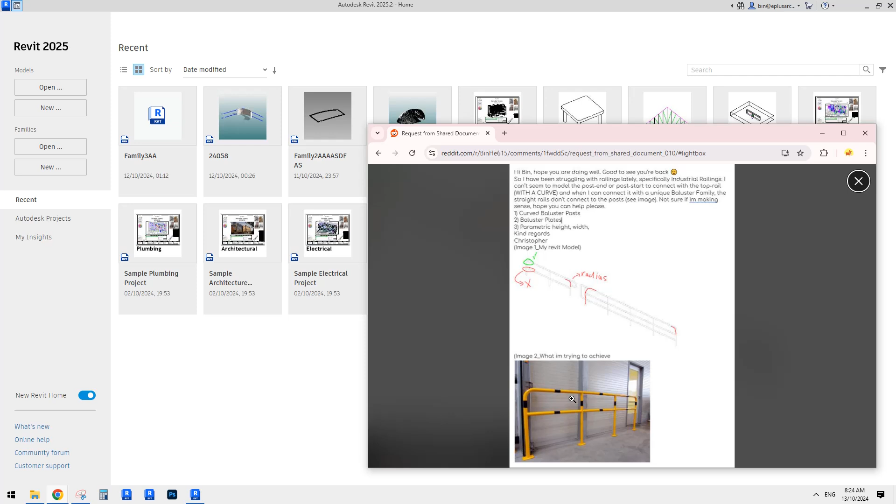Today we're going to model this railing, industrial railing. So we need to achieve this corner, which I think is quite simple, and how we can connect this bit. Okay, let's start. So we're going to start with a project.

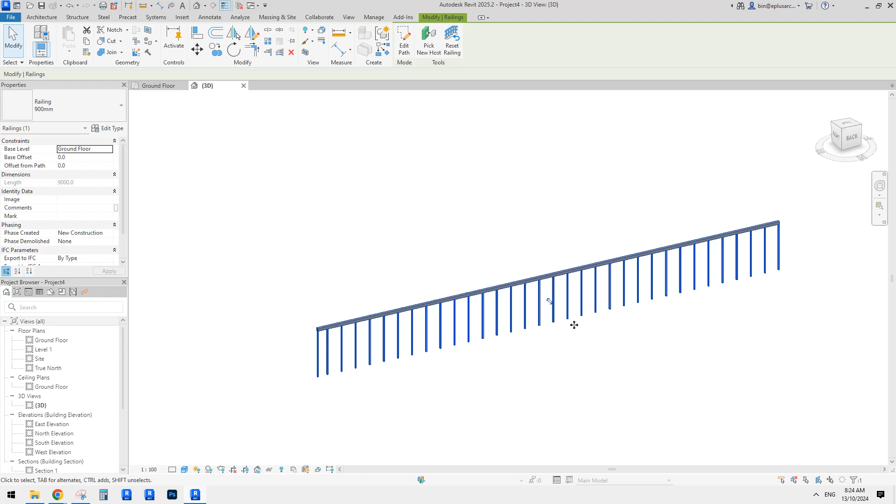Okay, so first I'm going to just create a railing. Okay, so finish. Let's go to 3D view. Okay, so this is a standard, a basic one. Oh, hang on. There are some more. Yeah, so these are some different ones, right? Okay, so let's start with this one.

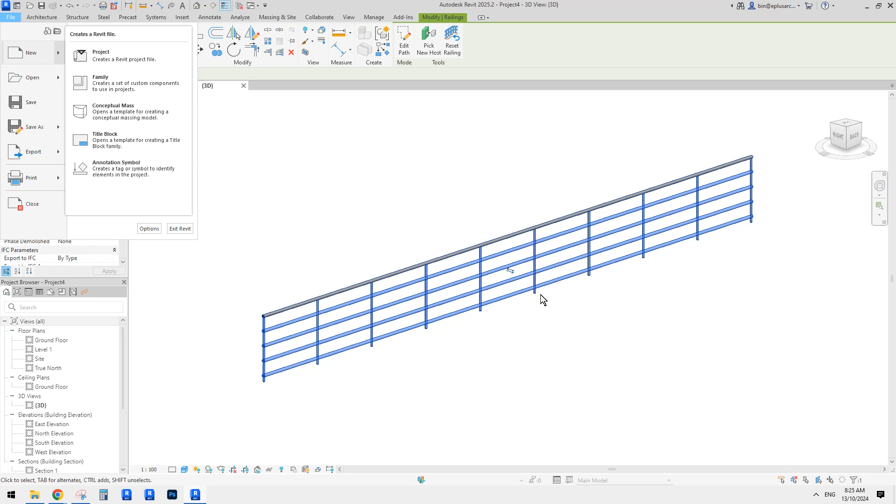Railing is a system family, so you can't just model one from here unless you wanted to just create a generic model, like a line-based generic model. But what we are going to do is railing, system family. So we need to start from one and go to edit type, and I'm going to just duplicate, so I'll keep the original one there. Okay, so I'll give it a name.

So now we start to change the settings. So first let's have a look. So this is quite simple. For the top one, you can use top rail, which is here, or you can also use non-continuous rail structure, which is here.

So if you click edit, you'll see in this family there are 1, 2, 3, 4: 100, 300, 500, 700, and this is top rail. So if we need to change it, apparently we need to delete some, so let's just delete this one and this one, and only keep one.

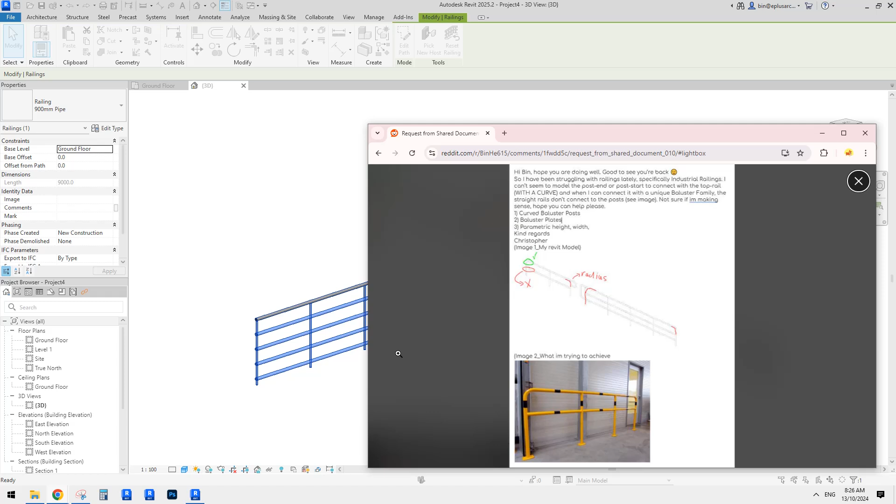Okay, and then for that top one, we're going to use top rail. So just check the height, so we can just delete this one. If you want to change this one, you can. Maybe I'll just delete this one and change this one to maybe 600. Okay, so apply, and you will see nothing changes. That's fine. Okay, so now we have this one and this one.

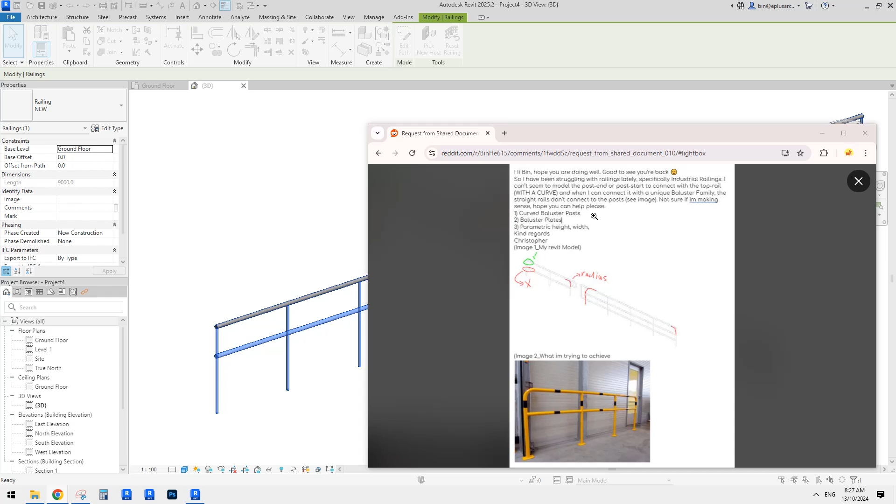So the top rail in this family looks okay. It's circular, 40 mil, which is exactly what it looks like. Yeah, that's what we need. But then, see, we need to change these posts. For posts, we have different options as well.

So you can see baluster placement. Balusters are usually those vertical elements. And then here we have options. So this is the repeating element here. So see, currently we have a 25 round.

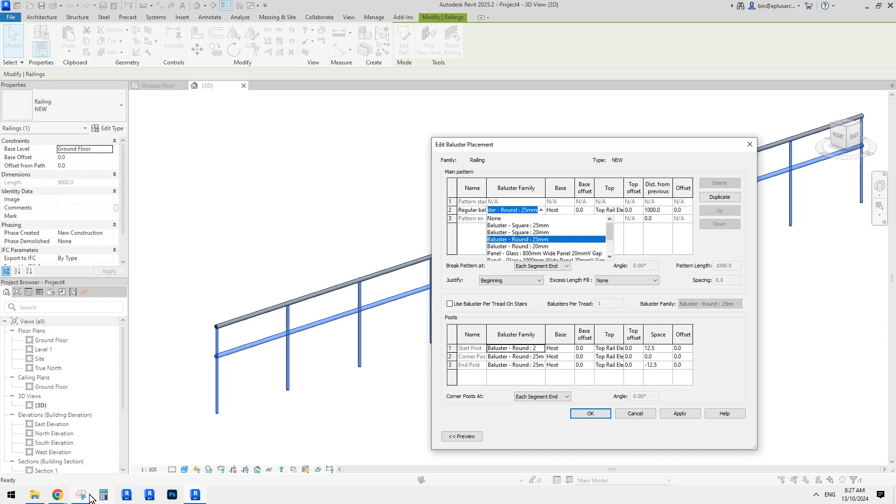So maybe we can change it, because in this image we can see it's quite big, same size as the horizontal one. So we need to change this one to 40 mil, but currently we don't have one. That's fine. We can create one and then come back and pick that. But just let me finish this.

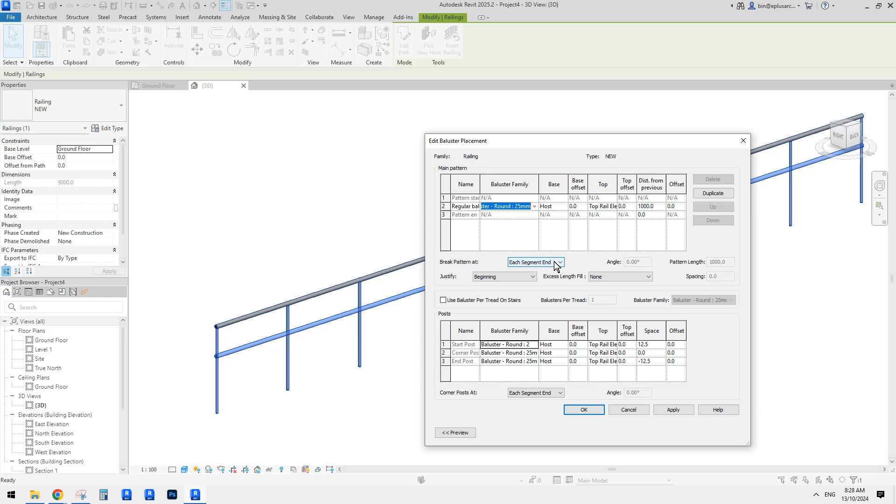Every 1 meter means the space between them is 1 meter. Okay, and also here are some settings. I'm going to explain them later. So for now, I'll just click OK. Okay, now we need to go to the project browser.

So it looks like in 2025 it's slightly different. Previously everything was in one, right? So sometimes it's a little bit hard to find things. Now it looks like it's been separated. So this is family. Great, so it's easier to find things.

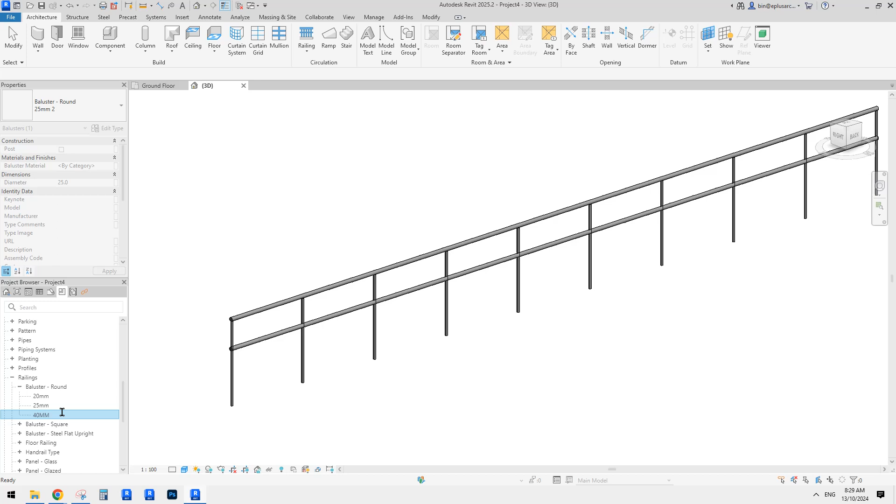So click on this, go to family, and under railing you will be able to find this one, baluster round. Click on this one, and you can see currently we have two different types, 20 and 25. So you right click on this one type, click on duplicate, and let's call it 40 mil. Yeah, capitals, that's fine.

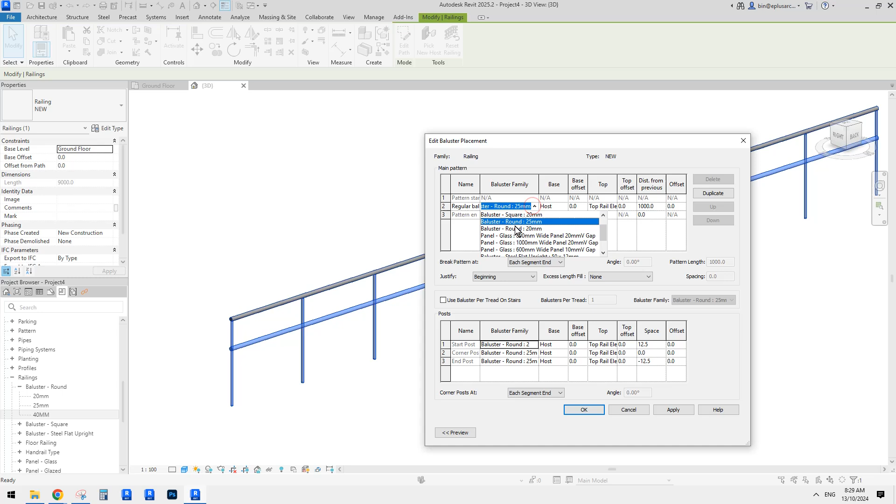And then double click on it, and here we can change the size, and also we can change the material. I'll just leave the material for now. Click OK. So now select this railing again, edit type, go to baluster placement, and here you should be able to find that 40 mil. Okay. So now if I click OK, apply, yeah.

So now they are 40 mil. Okay. So then this one and this one, they are still the old, the skinny one, because they are not part of this. One is the start post and the other one's the end post. So we just need to change this one to match.

Okay. So now finish. Oh, hang on. Let me just have a look, because see, this space is the offset, if I offset in this direction, parallel with the railing direction. It's 12.5, because previously it's 25 mil, it's offset by the radius of that post. So if you want this one to be exact, because when you draw this railing, you create a sketch line, right? So currently this one, I believe it's 9 meters.

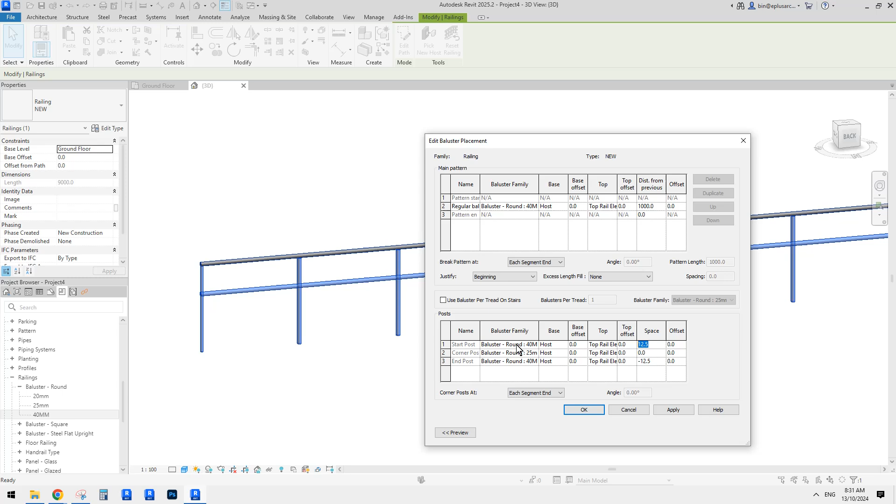If you want this railing, from the edge of this baluster to the other edge of the baluster, to be exactly 9 meters long, you need to offset this by half of the diameter, which is the radius. So you need to type in 20. Here, negative 20. When I click on apply, see, it will stay in the same spot, right? At the very end of this railing.

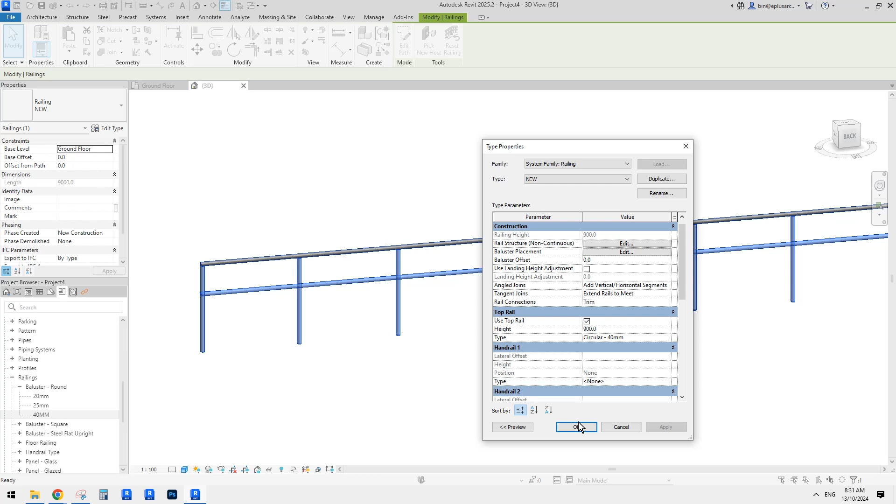So now let me just click on OK, and then this is a railing. Let's have a look again. So what else do we need? Okay, so this corner. Right, we need to do that corner. I don't think we can adjust this. For the top rail, I don't think we can. So let's just have a look here. Hand clearance is the offset perpendicular to the direction of the railing.

Extend length. Hang on. We might be able to. Yes. Okay. Extensions. None, but can we do a negative number? I'll try. 200, apply. Oh, maybe it's on the other side. Yeah. So you can see we can extend only a positive number, not a negative number.

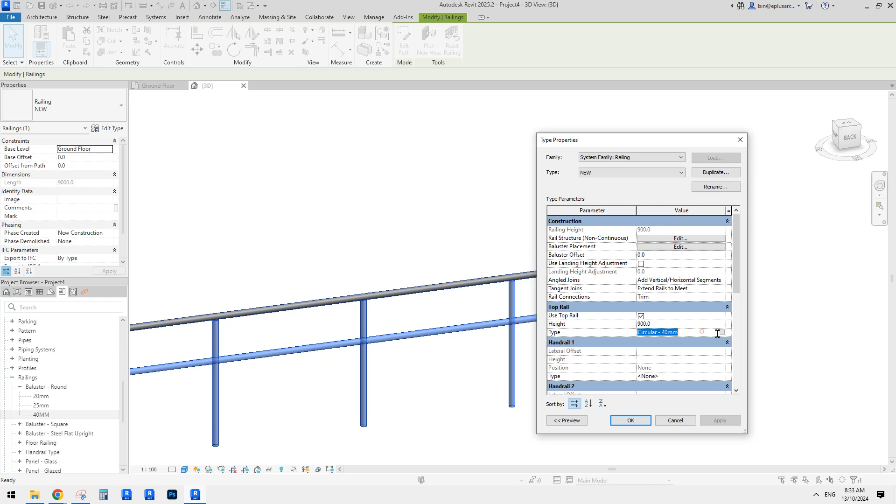This will have some effect on our family. I'll explain this later, but for now, let's just change it back. Maybe Control Z, it's easier. Control Z. Okay. So now let's just adjust this start or end post in order to make this corner curved. So we need to create a baluster.

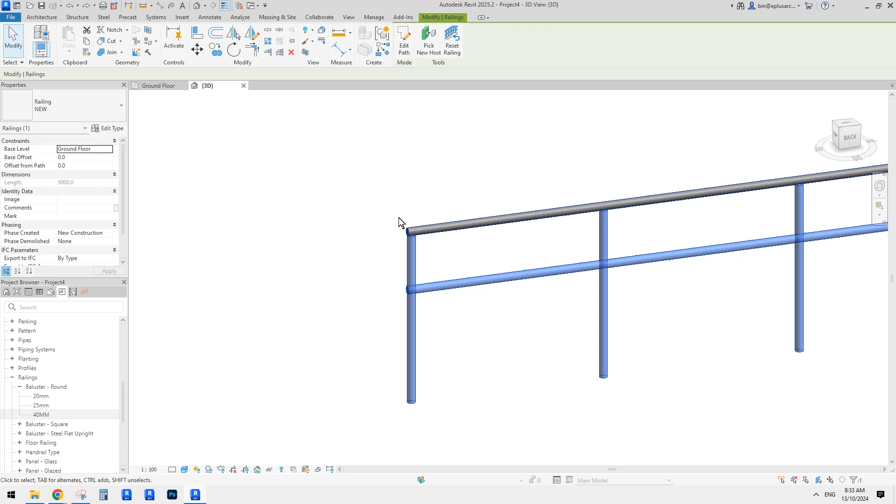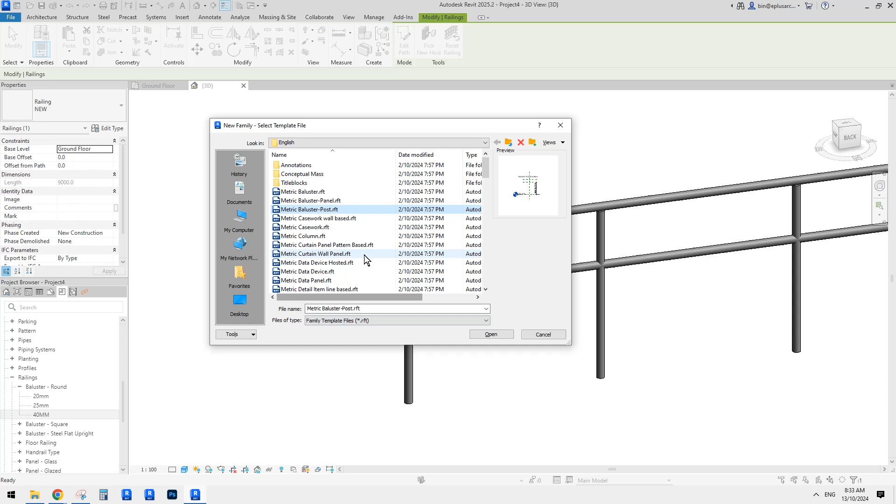So let's create a new family. So it's baluster. Which one? These two look like they have an angular parameter for the railing. For this we don't need it. It looks like it's always vertical. So maybe just create a baluster post.

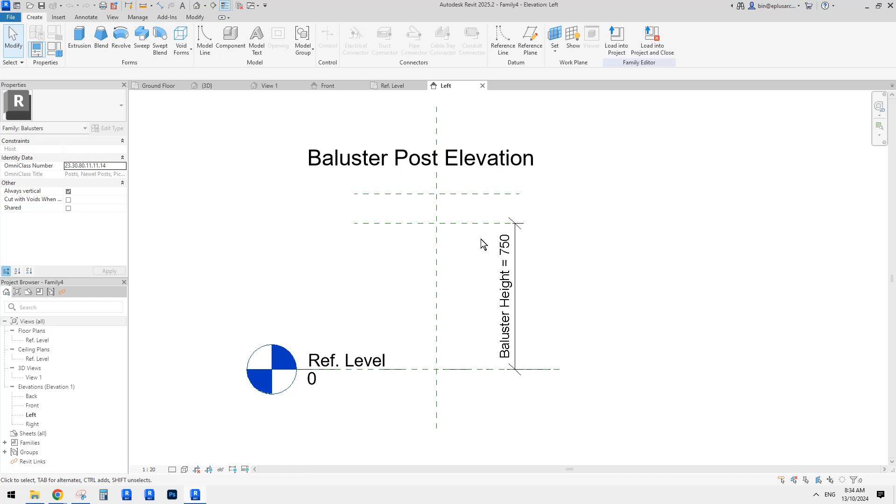So start. When you start a baluster post family, the default view is always a left elevation. Left elevation means this will be the starting point, and this is where the railing goes if you draw a railing. So what we need to do is just create a couple of reference planes to dimension. We're going to use this for the radius, the arc. So select these two dimensions and create.

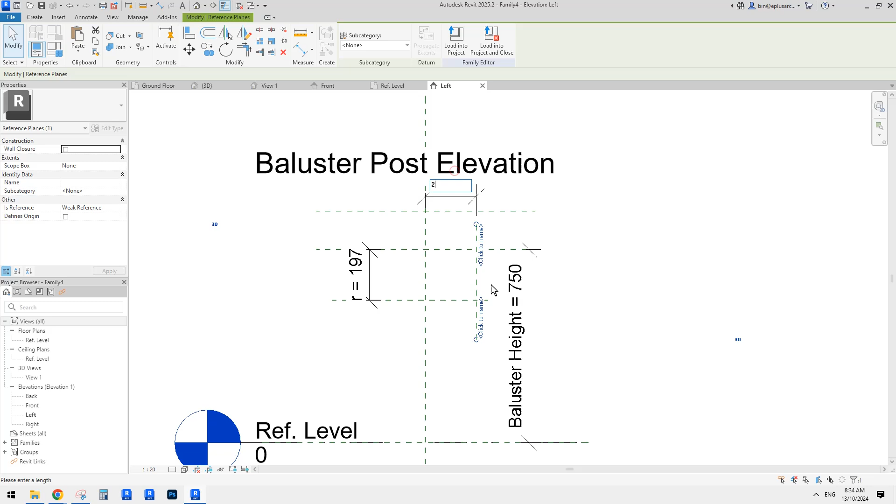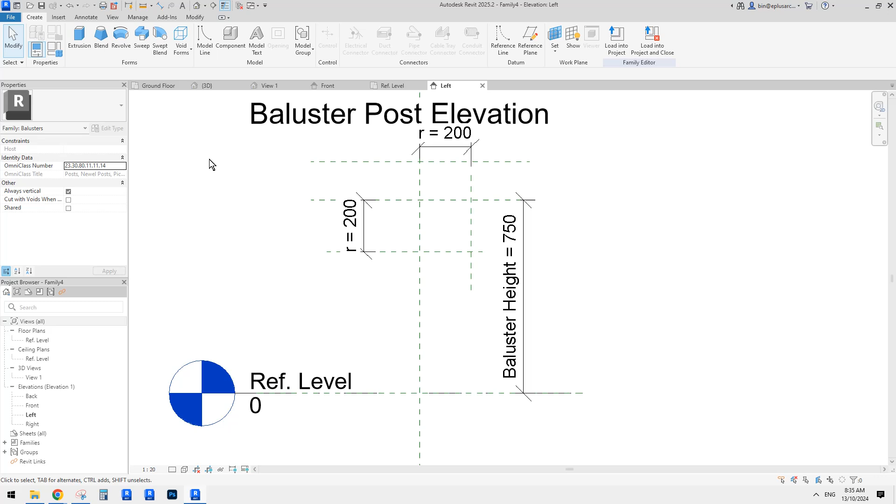Let's just call it R, radius. It will be a type parameter. Now maybe I'll change this one to 200. So now we have this point. And when we create this one, it's easier to use sweep, because it's an arc. I think you can only use sweep in a way. Okay, so sweep. Oh, hang on, cancel that.

It's easier to have something we can just directly pick instead of trying to create a sketch. You can also do that, but let's just create some reference lines first. Reference line. We need to pick a plane. Currently we're in this view, elevation left. Imagine if you look from the top, you will see a reference plane for left and right. So we need to pick the center, left, right, to place these reference lines.

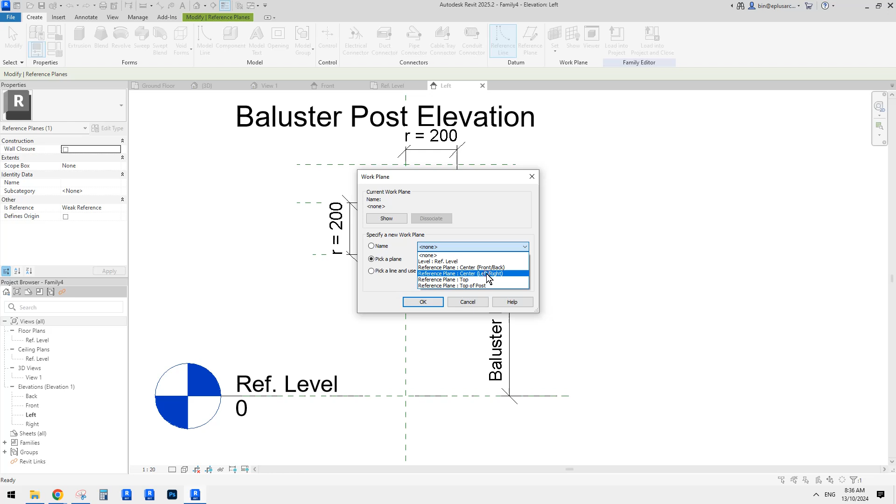So click OK, and then now we can just draw a reference line from this point to this point, and then another one will be center and its arc. Okay, so center is here, ends are one here to here. So now let's just type VV.

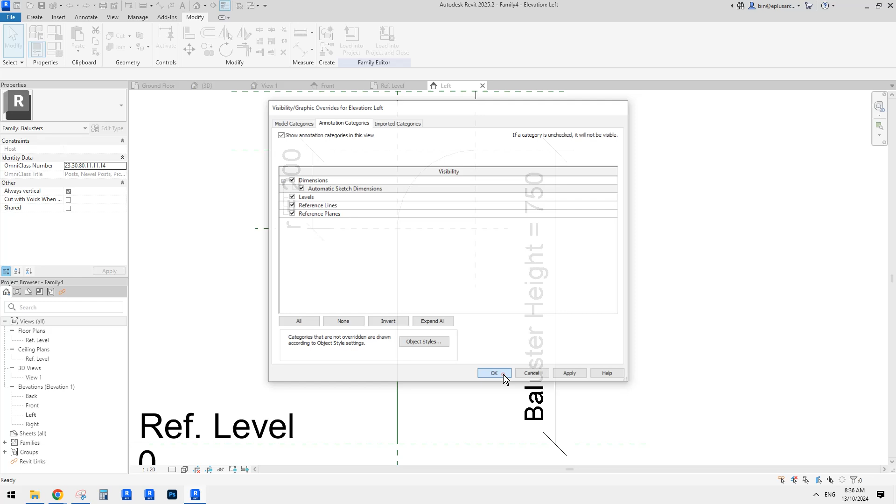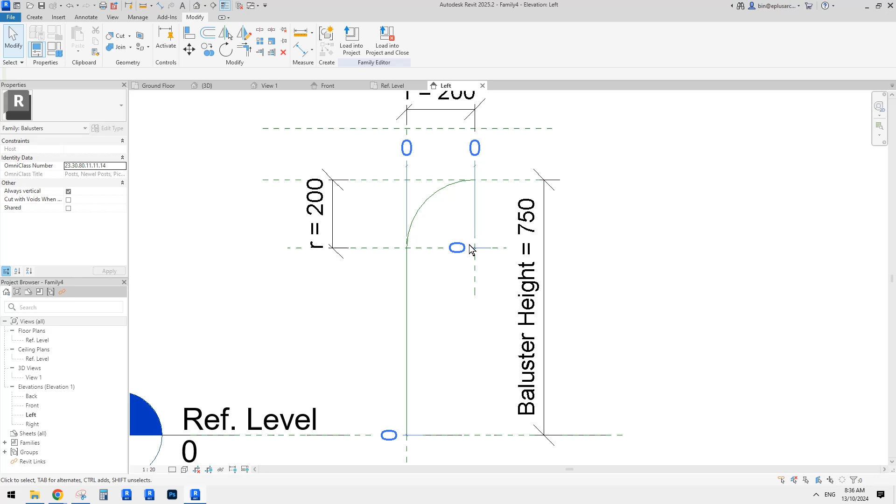I'll check this automatic sketch dimensions. So yeah, we're trying to get rid of all this. So make sure. I think probably not. It's not necessary. Let's just have a test. So you can see, because this is a very, very simple scenario, Revit understands what it needs to do. So maybe we don't really need to lock everything. So let's just leave this as is, and then we can create a sweep.

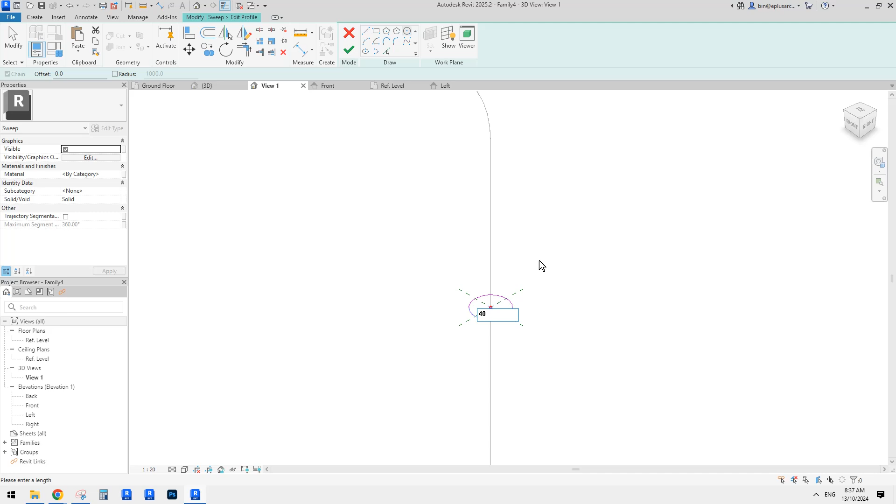Okay, so pick path, pick this one and also this one. Finish, go edit profile. So can just pick any view. So let's just do a 3D view. Create a profile. It will be a 40 mil diameter circle, which means it's 20 mil radius, right? So finish, and let's go to left view again.

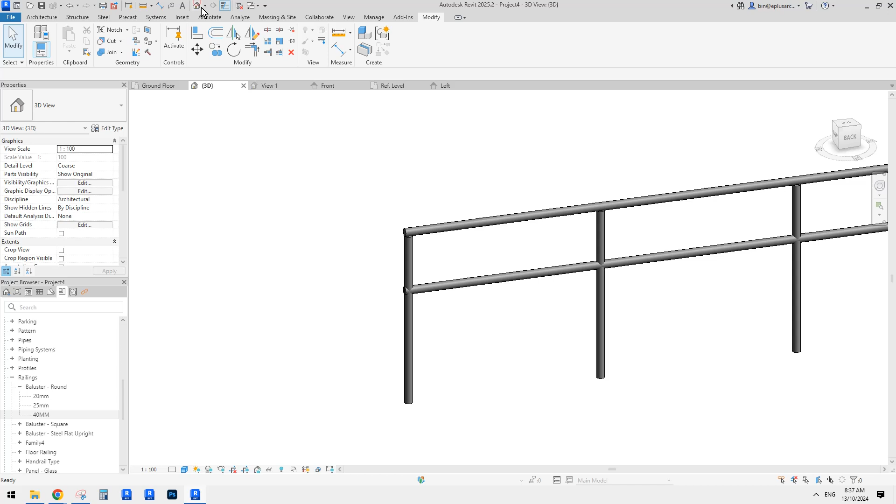So let's just flex this a little bit. So make sure it works. Okay, great. So now we can load this one into the project. Okay, into the project. Now go to 3D view again, select this, edit type, go to baluster placement, go here. So we're going to change this one to the new family we just did. Click OK and apply.

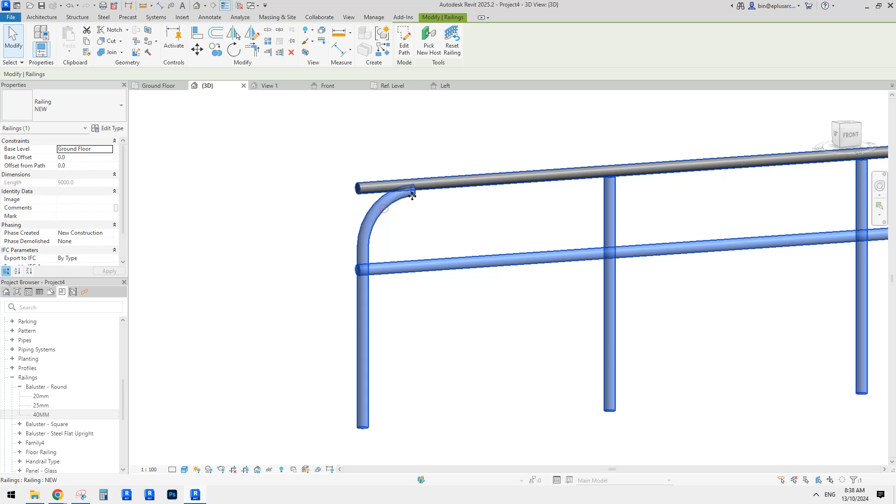Maybe this is the end. Yeah, here. Okay, so now we have some issue here. So let's try to fix this. So first, the height is currently not matching. Looks like, so this top, yeah. So you can see the top of this is matching the center of this railing. So let's have a look. Edit type.

So baluster placement. Currently, this family is using host, which means imagine that's a floor. Top rail element. So currently it matches the top rail element. So looks like go there, top offset. So I think one option we can try is add the 20 mil radius, so they might be able to match. So let's try top offset 20 mil, apply. Oh, this is not what's expected, but yeah, looks like we have some issue with this one. Oh, interesting.

Maybe we can try just manually match, because I think the top of this one should be 900. So maybe instead of using top rail element to set the height, we can always use host as well. So it's like drawing a wall. So instead of having this level and another level, we can use the same floor level, right? So with top offset. So if I type in 900, it should give us, no, don't like it. 880, so now which is 900 minus 20, right? So yeah, I think this will work.

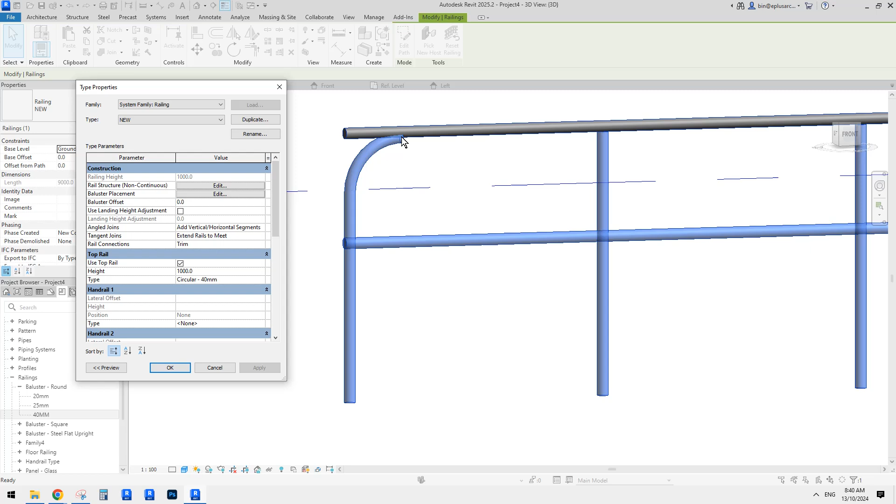So yeah, just make sure. If I change this one to 1 meter, just make sure you change this one to 980, right? So I'll just do another test. Try this again. Top rail element. If I type a 0, it's like 20 mil lower. And if I type 20 mil top offset, it will, no. So I think this is a little bug maybe, but yeah, we can always do this.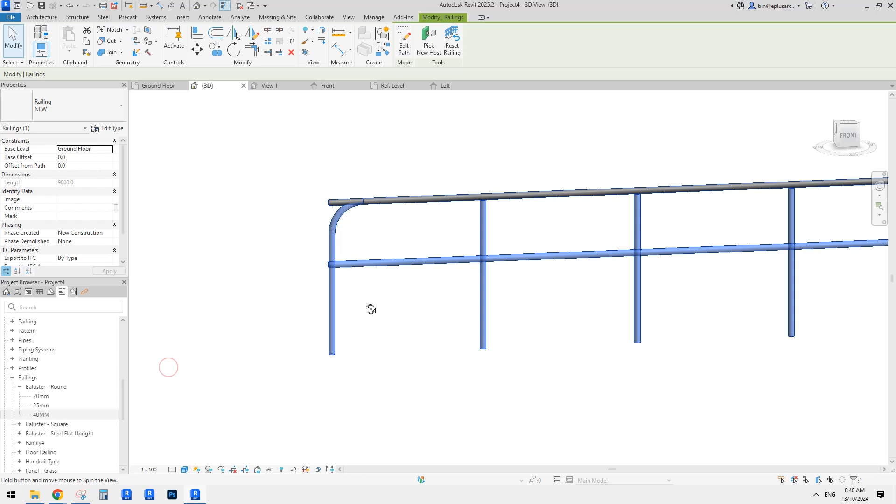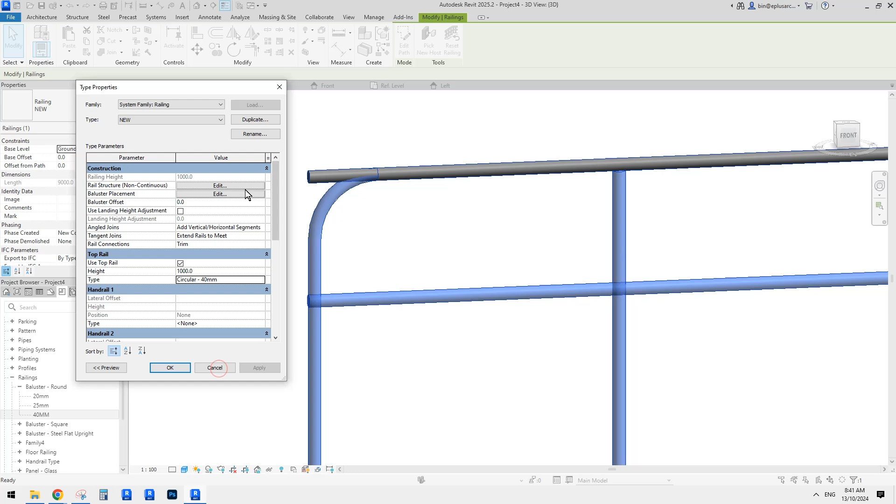Okay, so that's this. Now we need to adjust this one. As I previously showed you, we can't extend, have a negative number. What that means is we need to move this baluster instead of trying to cut this. So I think the distance will be like the radius of this one, which is 200 for this. So let's try that. This is top rail, sorry, go back to baluster placement.

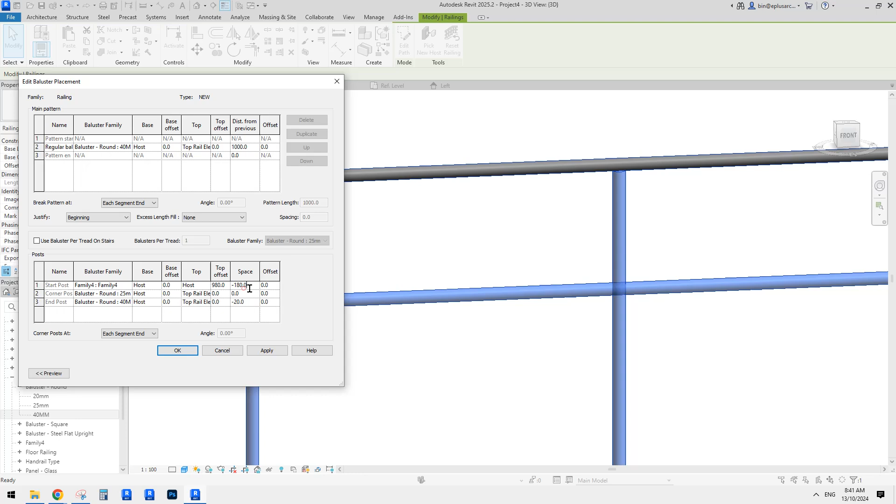And for offset parallel with the direction of the railing, we can use spacing, right? So currently it's 20, we try to move it to the right direction by 20. Which means we need to move this to the other direction, so maybe 180, I don't know. Let's try. Apply. Oh, looks like we need 200 exactly. So let's go back, type in negative 200. Okay, apply, that's it. Okay, so I'll leave this one for now.

Let's just place another one. So for the other side, we can't really use the same because I don't think we can rotate them. There's no option. I don't think there's any option to rotate them or do anything with this.

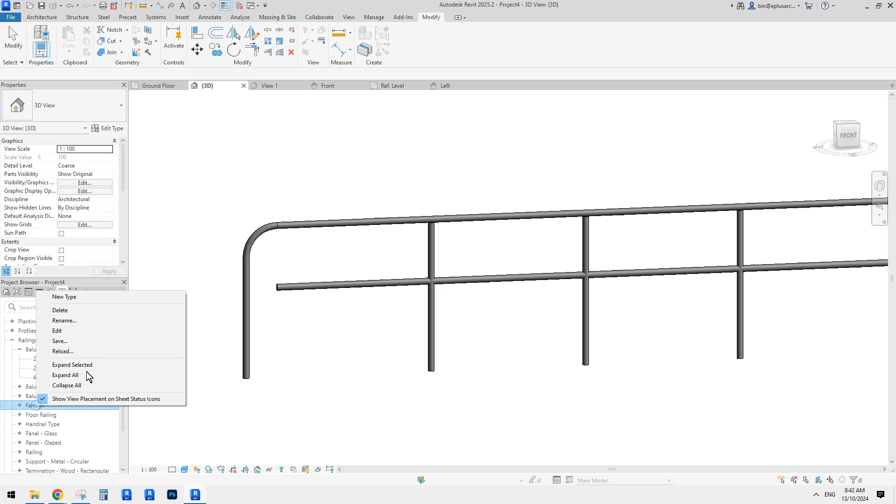So what we're going to do is go to railing, go to the family we just did, right? So this one, I'll just right click, edit, and I'm going to just go back to the left and change this one. So instead of having this on, we need this reference plane. We need this one to be on the other side.

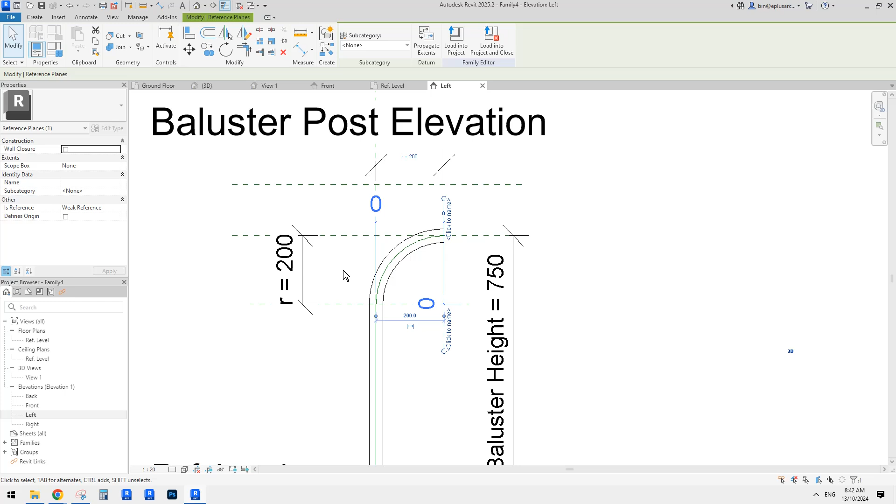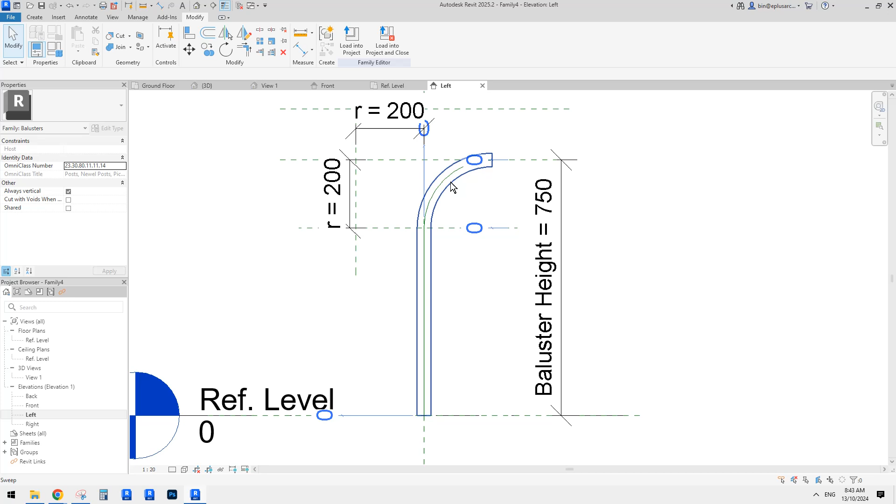So I'm going to MM, and maybe I'll just untick this copy. Hang on, maybe we can just keep that one. So let's try MM, untick that copy, click on this. Element will be deleted, so this dimension will be deleted. That's fine. Click OK, and we just add this dimension back and link this to the radius again. And this reference line as well. So I'm going to MM, pick this reference plane.

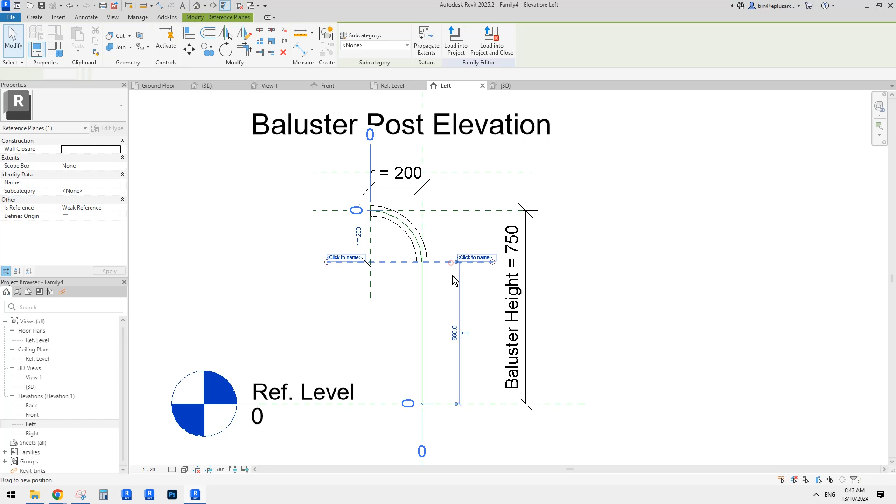Good. So now this one we can just go edit sweep, pick path, delete this, pick 3D edges, pick this one, finish. So now we have another one with the opposite direction. Let's have a look in 3D view. Maybe go back to left and then try to flex this. It works. Okay, good. And then we just need to save as a different name. Save. Load this one back.

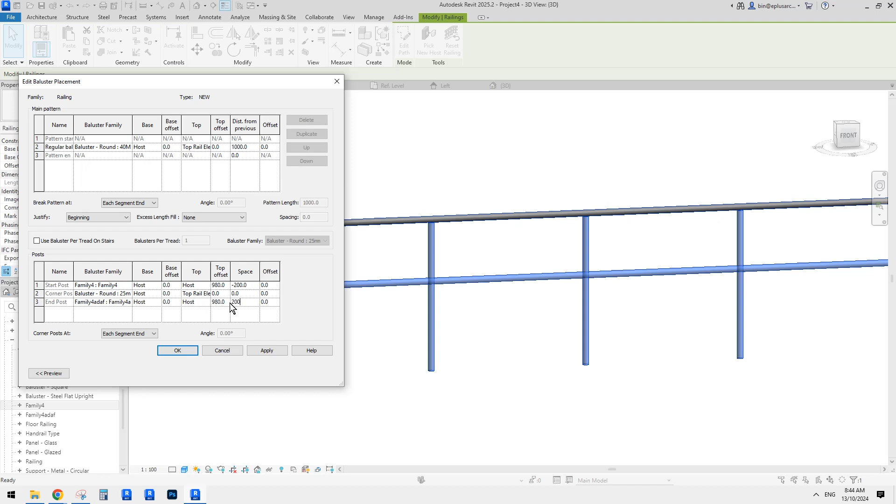Go to 3D view, select this, edit type, go to baluster placement, go down here. So we'll just pick this one, the new family we just saved, and then just do the same thing for the height, and do the opposite. It will be positive 200 for this one. Click OK, click OK. So now we have them on both sides.

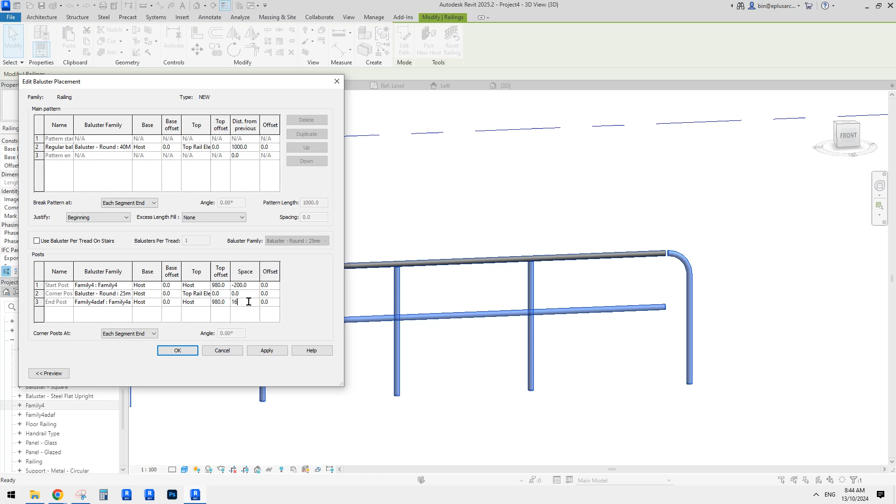Oh, what's going on here? Edit type. Let's have a look what's going on. Yeah, I don't know. So this one, if I type 0, and maybe this one needs to be 180. I'm not sure why. Oh, even 160. Why? Yeah, I don't know. Anyway, let's just leave it. There must be some reason. Maybe it's in the family.

Because we have those radius, it's possible to change the radius of this corner, but you can't just do anything from here. So you need to go to the family itself. You need to double click on this because we have this radius, right? So if I change to 150, for example, click OK. And of course, when we change the radius, we also need to adjust the distance from this end to this baluster.

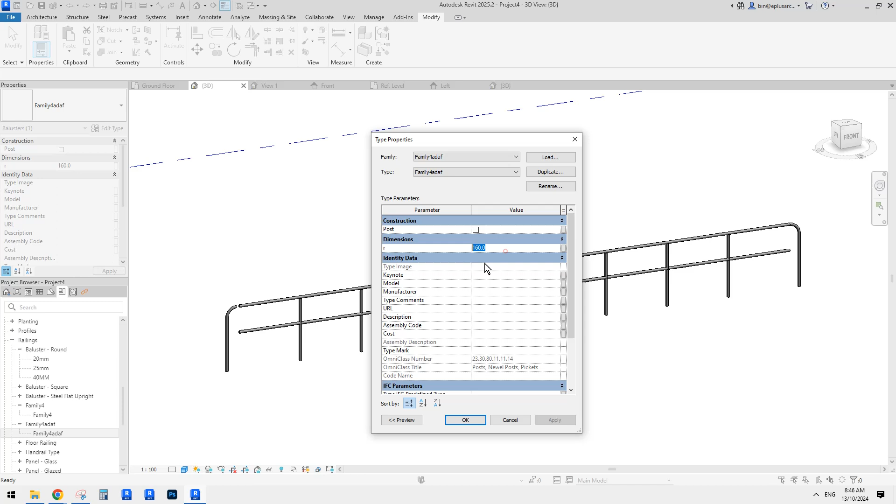So let's try this one as well. Okay, so this is why. Because when we loaded this one into the project, the 160 in this family is a default. So this was 160, and this was 200. This is why we needed a different number. So now let's just change this one back to 200, and this one to 200 as well. Then select it, edit type, go to baluster placement, change both to 200. Of course, one's negative, one's positive. Apply. So now it's all good.

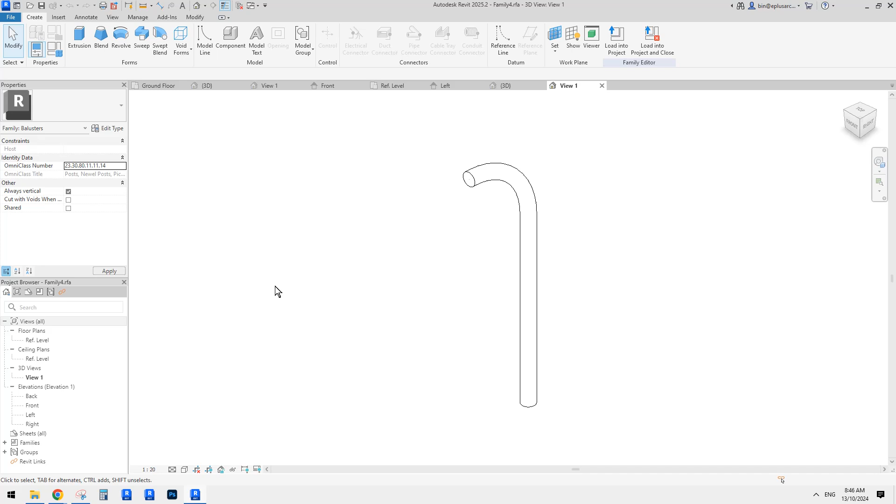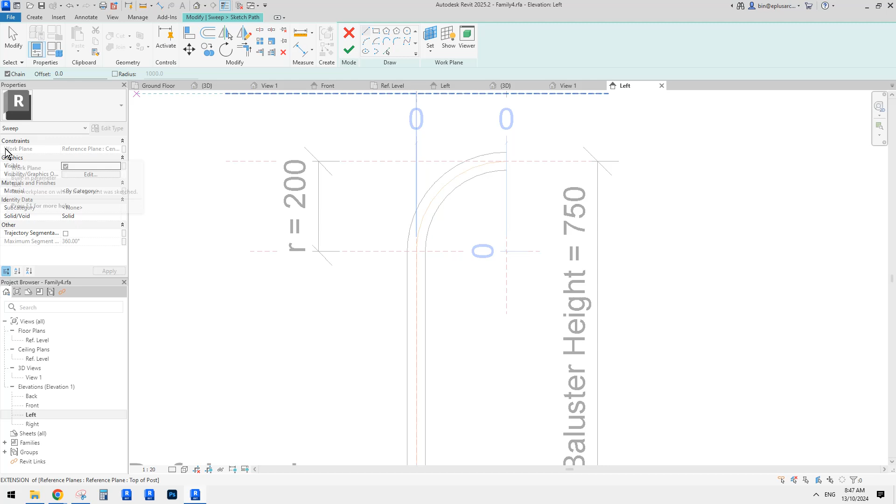And then we just need to add this bit, right? So let's right click on this family and go to left. If you want to, you can also add a reference line, or you don't have to. Let's try the method without the reference line. So sweep, and this time instead of pick path, we can use sketch path. Because previously we set reference to center left to right, currently the work plane is center left to right. Yeah, that's correct. So let's just draw a line, something like this. This will be the path.

Finish. Go edit profile. Let's go to 3D view, or you can go to elevation as well, and then just do a circle, right? And then finish. Let's have a look in left elevation. That's it. I'll test.

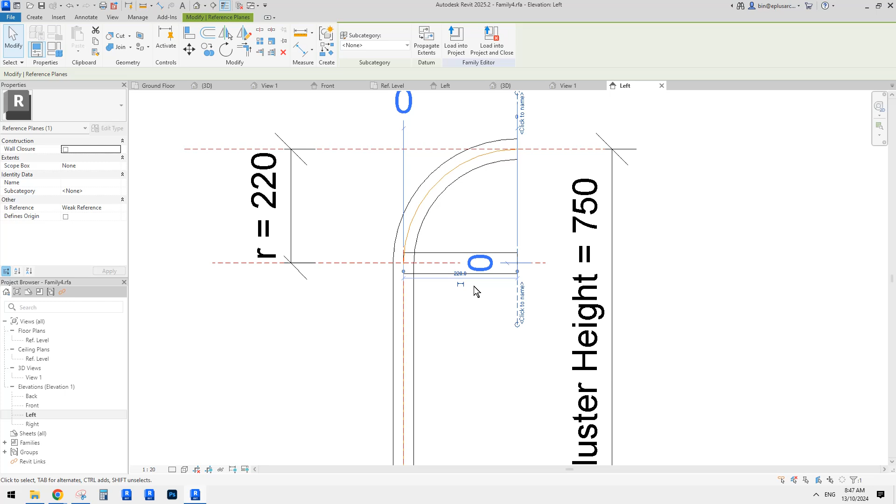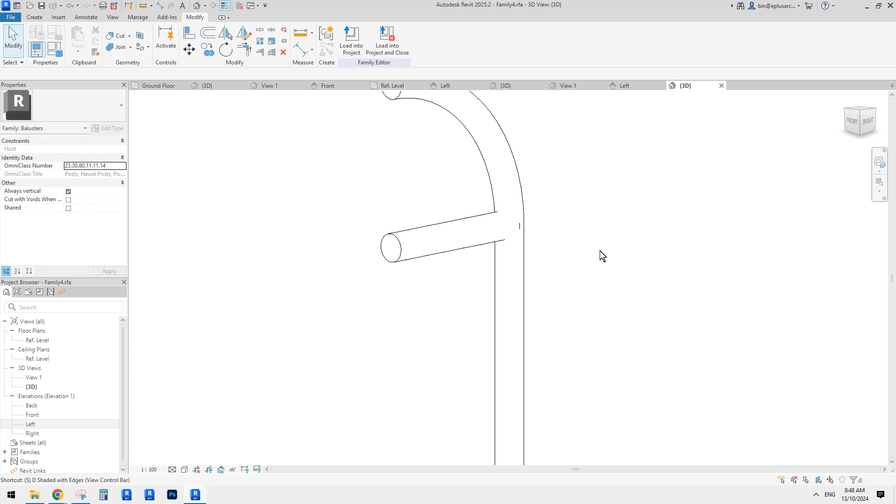So you can see, in this scenario we don't need to lock everything because it already understands what we want to achieve. So if it breaks when you try to adjust, you just need to constrain them properly. And also I'm going to join them to create that corner. If you do not join, you will see this. I'll type SD. So this is what we have, and if we join them, it creates those edge lines. Okay, so this is it.

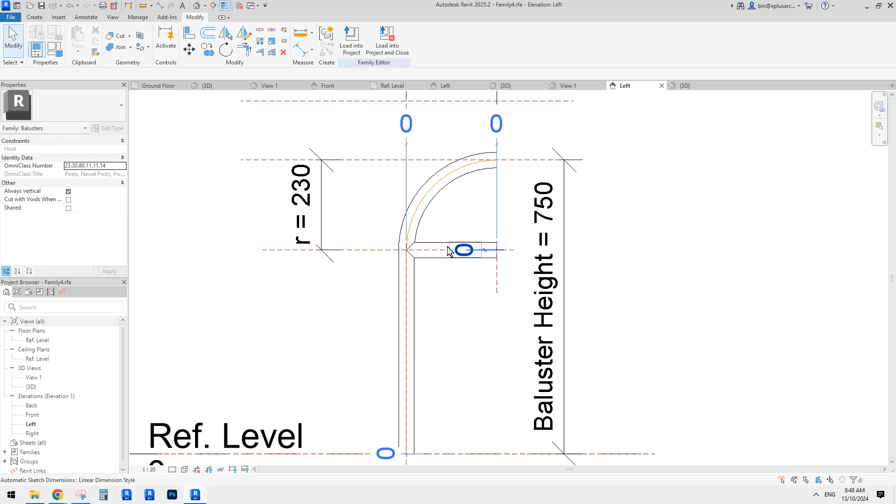Now we can just load this one into the project, overwrite. Okay, sorry, looks like we need to adjust that height. That's fine. Let's go back, edit. Instead of drawing that one, we probably need another reference plane so we can adjust. So I'm just going to do this one. What do we call this one? Spacing. Maybe call it H. Okay, so H.

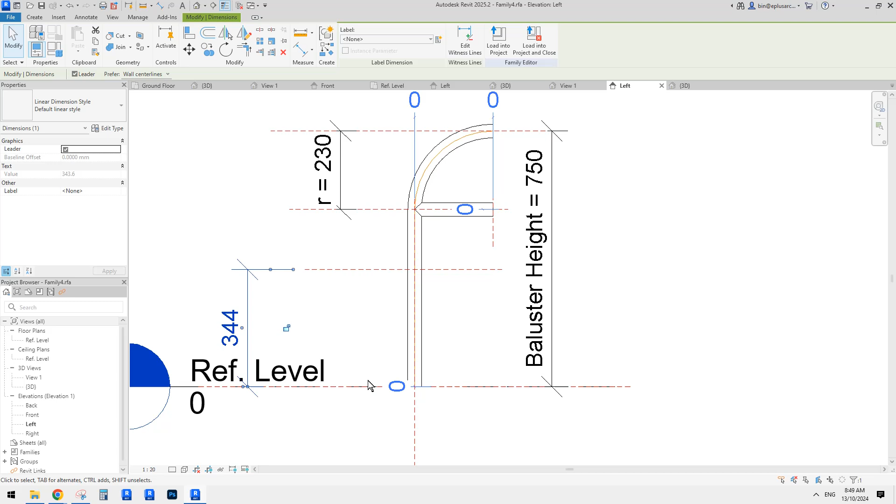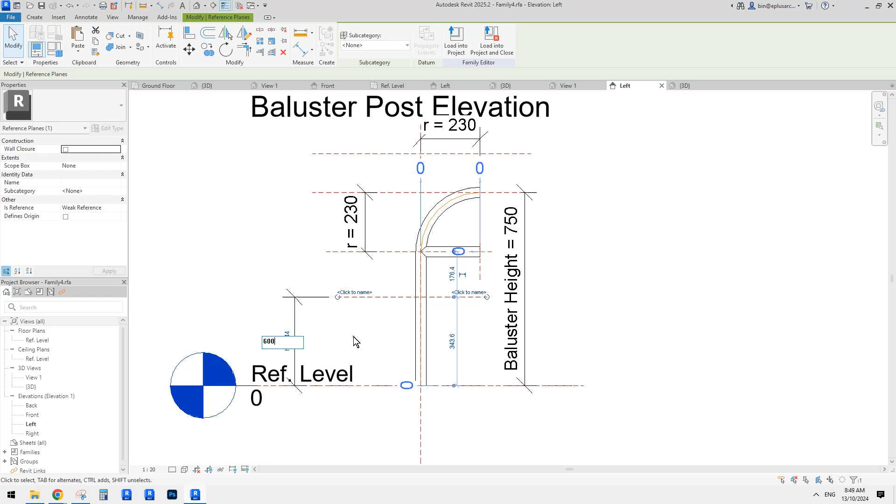Or hang on, maybe it's easier to dimension this one from the floor, because when we set the height of this non-continuous railing, it's always offset from the floor. So maybe we do it this way. Now we can call it H. And this one actually needs to be 600. Now we can go back to this sweep, edit sweep, and then edit sketch path. We're going to use align to lock this onto this reference plane. Okay, finish.

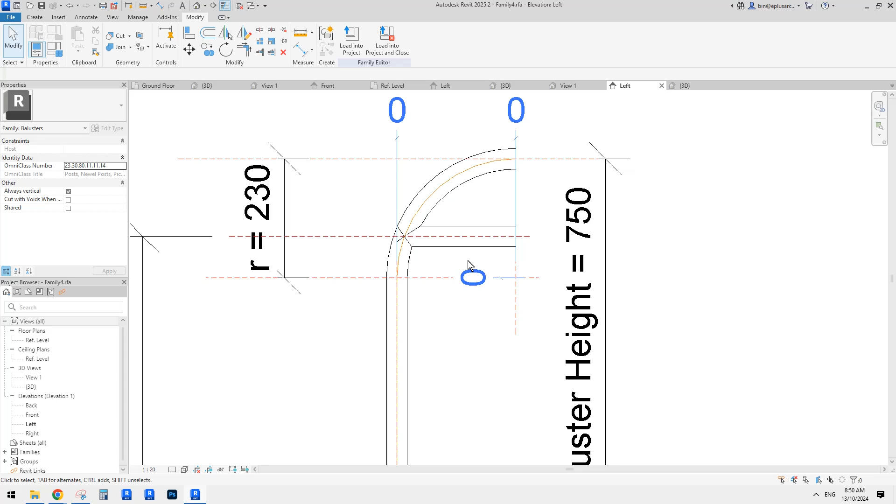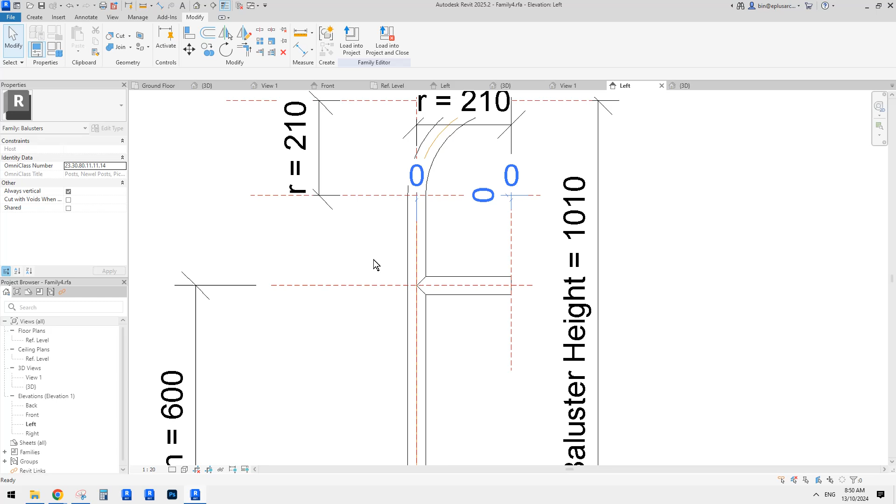So now let's have a test again. Don't worry too much about how it looks here. Let's just move all these reference planes up. It's more like this, right? Remove constraint. Not sure why. Click OK. Let's have another test. Okay, so see the top bit works. This bit also works. So this is it. Now load this one into the project, overwrite, and okay, so that's fine.

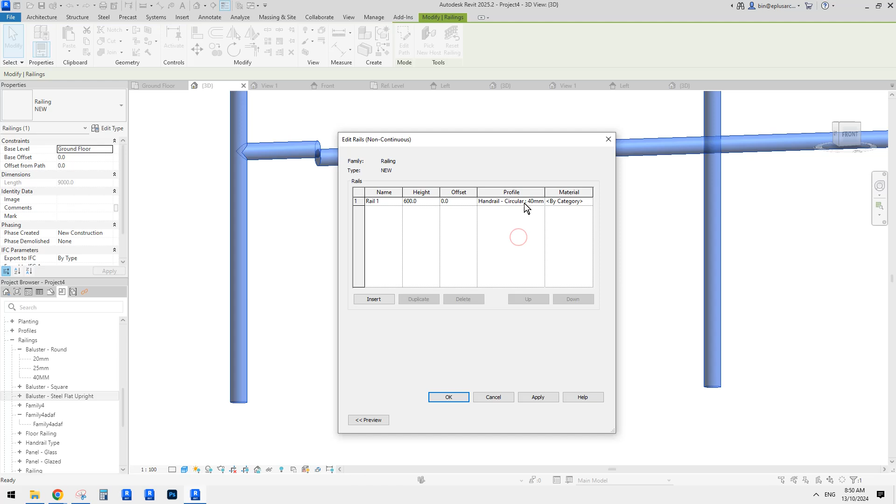So looks like when we set the height it's from the bottom of this to the center, but when Revit sets the height of the non-continuous railing, it's using the top. That's fine, we can always adjust. So let's adjust our family to match this one. Just go to the family here, double click, we have this H, just need to minus this by 20, so 580, click OK, that's it.

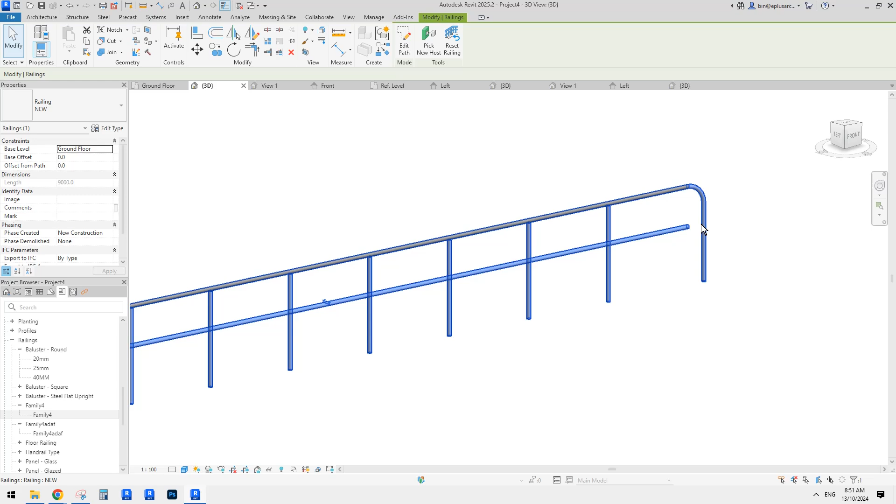Okay, so I'll leave the other side to you. Have a try to modify this family to create something like this. Okay, so now I think this is almost it. If I type CS, create a new one, you will see this is it.

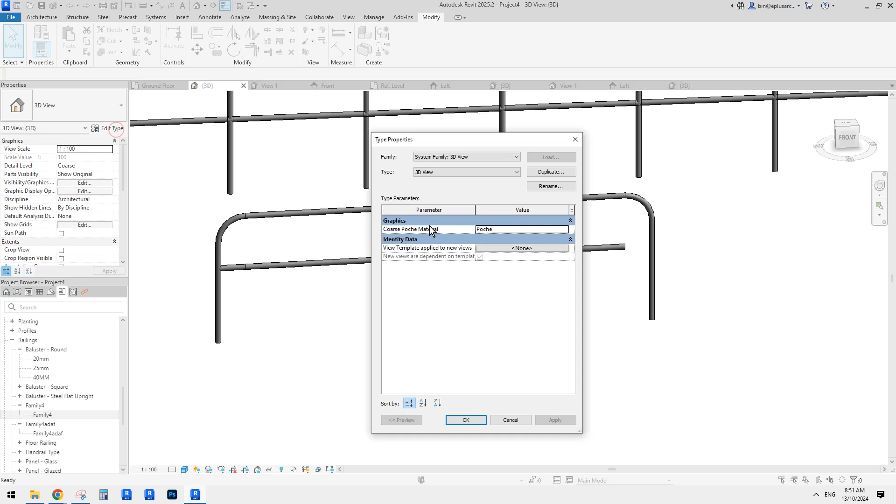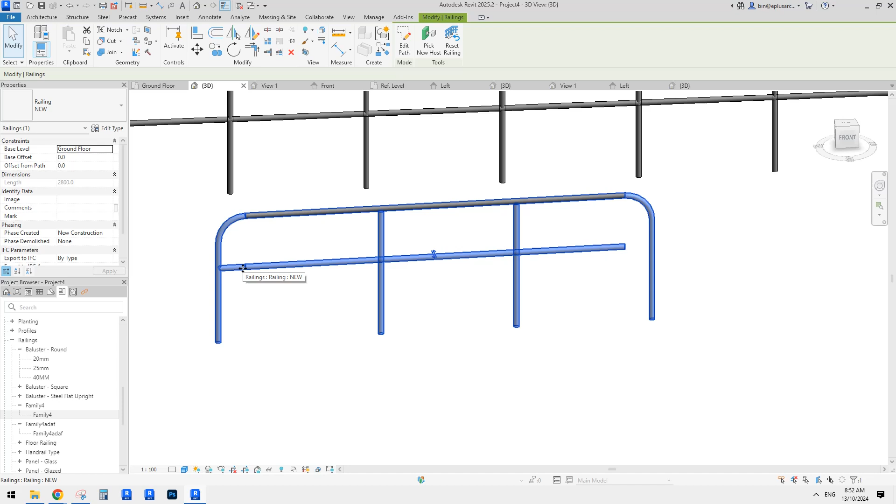So the only thing not perfect in this family, let's have a look. Edit, edit type, is the spacing. Currently we have this 1 meter spacing here, and it's using space beginning. So it means this is exactly 1 meter from here to here, and 1 meter from here to here, and then whatever is left is here. Currently it's almost 3 meters. So if I do 2.4 for example, 2400, you will see this is what we get.

Of course we'd want them to be equal, 1, 2, 3, but I think the best we can do is change the justify setting. There are 2 options. One is center. If I click OK, you will notice center means it's measured from the center. Start from center: this is 1 meter, this is 1 meter, and this is what we have left on each side. Another option is spread pattern to fit.

This means we can have 3, in this case 2. Let me just have a look why 2400. It's a bit hard to achieve exactly, sorry about that. So you can see we have 3 equal sizes, 1, 2, 3, right? And then when I try to reduce this one, at some stage it becomes two, right?

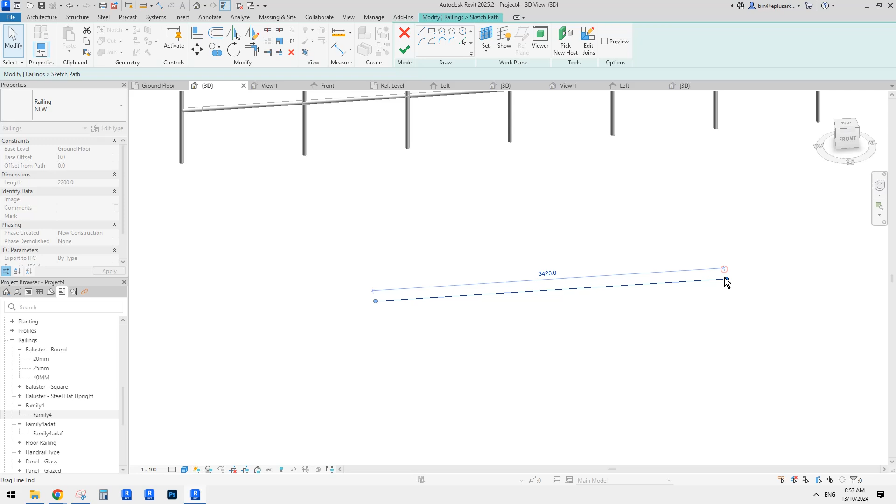Two equal spacing, so I think this one's fine. I think this one's okay, but the only thing I'm not happy with is we can't achieve equal spacing for this one, because we offset this one to the left. So when Revit tries to have equal spacing, it's always measured to this point instead of here, because to Revit this is just one post, so it's exactly the same as this one, which should be here, but yeah.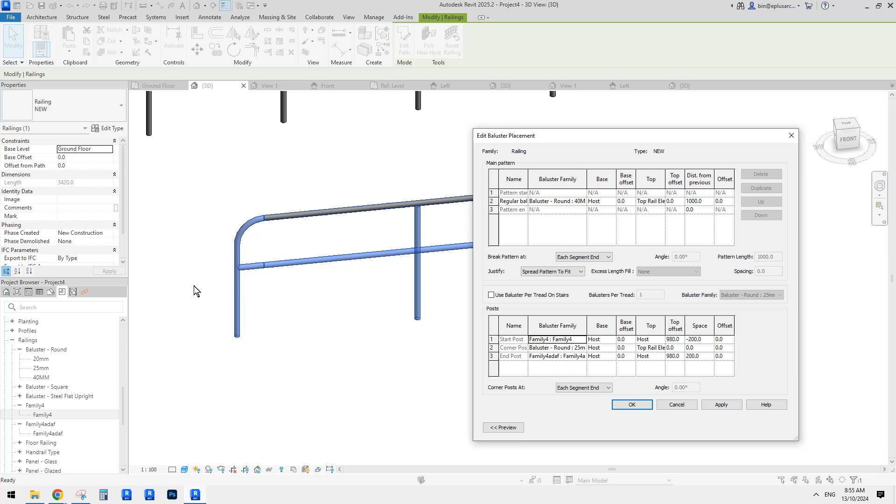If we model this one with the offset, it won't help us. It will only help us if we model this one instead of this as the center, and use this one as the center, and it will help us with this spacing. It means we don't have to change this one at all. So it will always offset, but it won't help us with the spacing, the difference between these two posts and these two posts. So yeah, I think that's it.

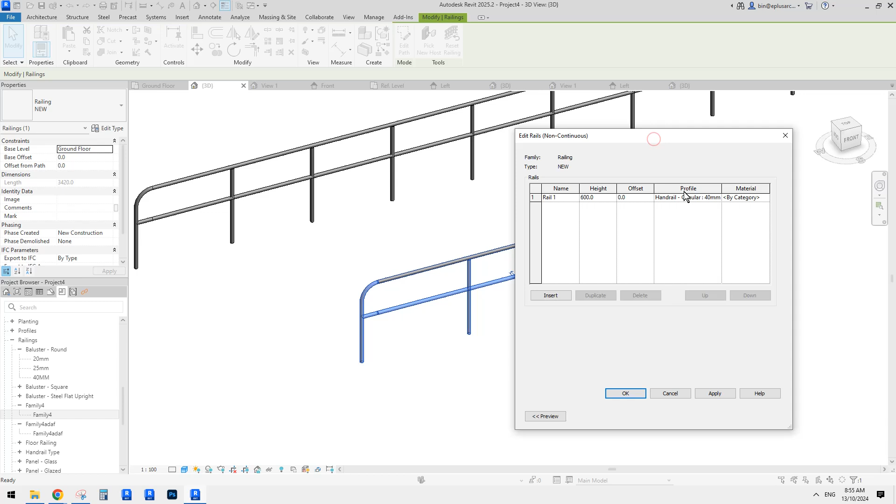And what else? Railing. So for railing as well, we can't really offset, so we can increase the length or reduce the length. If we can reduce this to this point, we can have this one, which means we can have the same spacing, but looks like we can't. There's no option here. So yeah, I think that's it.

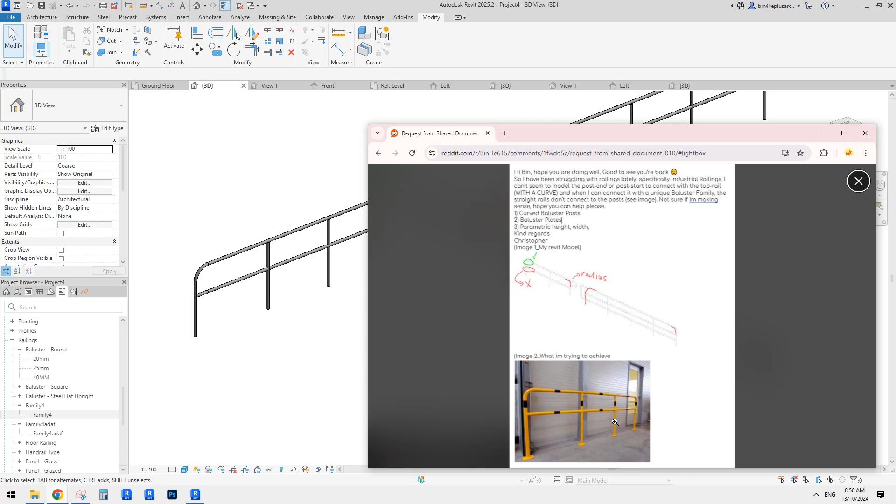What else do we have here? Curved baluster posts. Yeah, so baluster plates, I'm not sure what that means. So I think it's height, width. Yeah, so we can adjust the height, of course width, maybe spacing. Yeah, we can still kind of adjust.

So baluster placement, go there. So you can adjust this, right? So if I change to 600, we'll have more posts. Okay, Control Z.

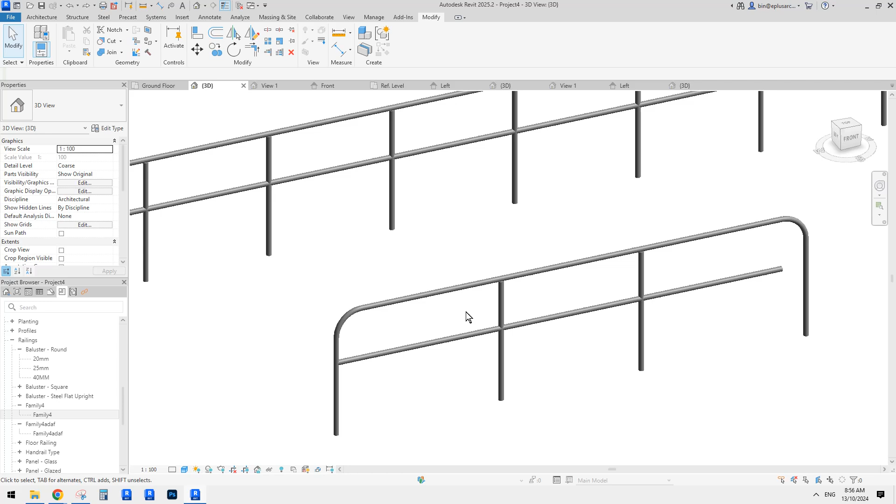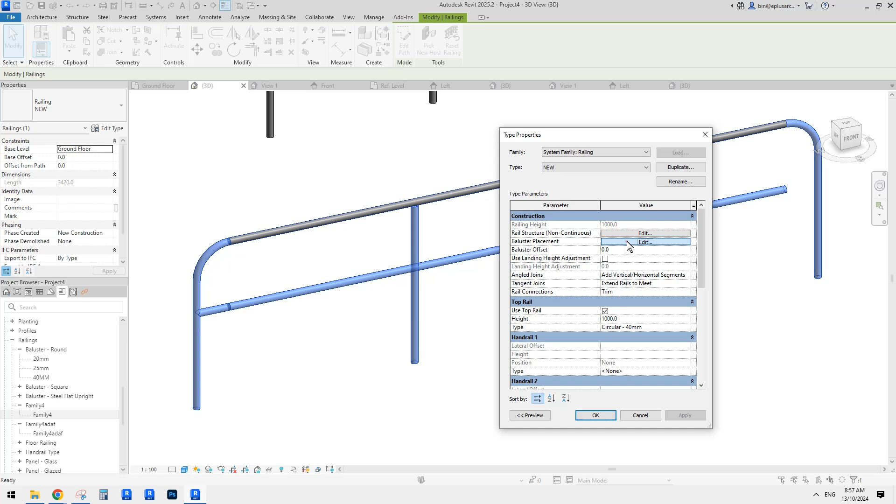A quick one, probably not exactly matching this one, but what you can do is go to baluster. So currently we only have this baluster, so post. We need to duplicate, and then we just need to create a panel. So for example we have this one panel here, so already there, so maybe you can just use this one. But I believe we need to change the offset, for example 500, right?

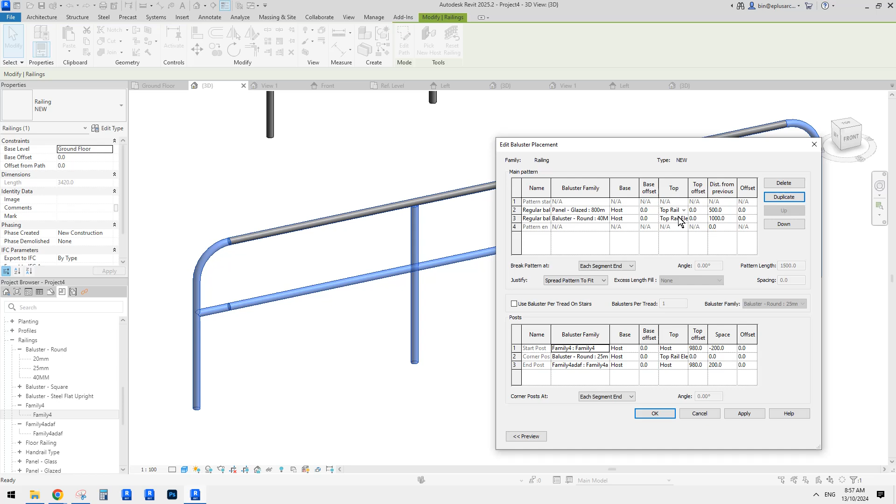Host top rail, I'm not really sure. So click OK, I'll see what it looks like. Okay, this is okay, 500.

Yeah, we need - okay, so it looks like we might need to adjust the height and also adjust the spacing of these posts. So let's go here, baluster height. So maybe I'll change it manually, make it 500 height, something like that, maybe 550. So for distance, maybe we'll try to change this one to 500 as well. So click OK, apply. Yep.

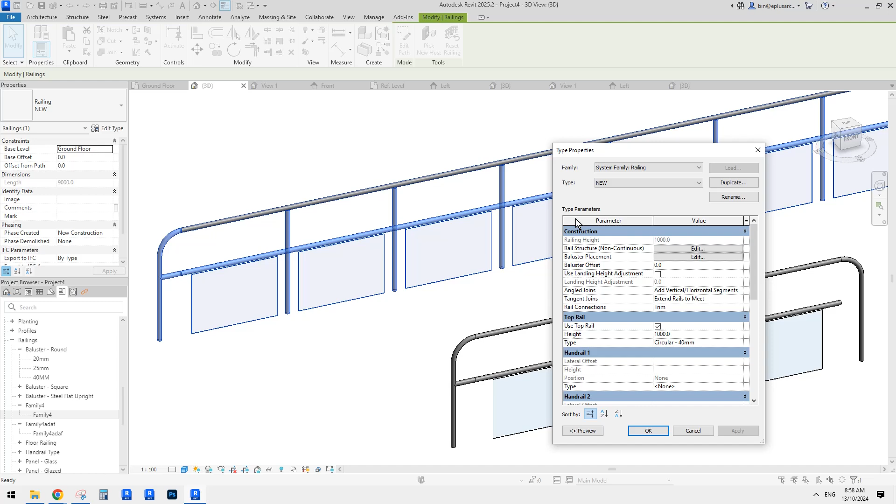So imagine that this is a plate. Okay, so yeah, and also because this is 800, and also you can't change the width of this panel anywhere here, so you need to go to the family as well. So you just need to figure out what that family is called. So what's the name? Panel glazed.

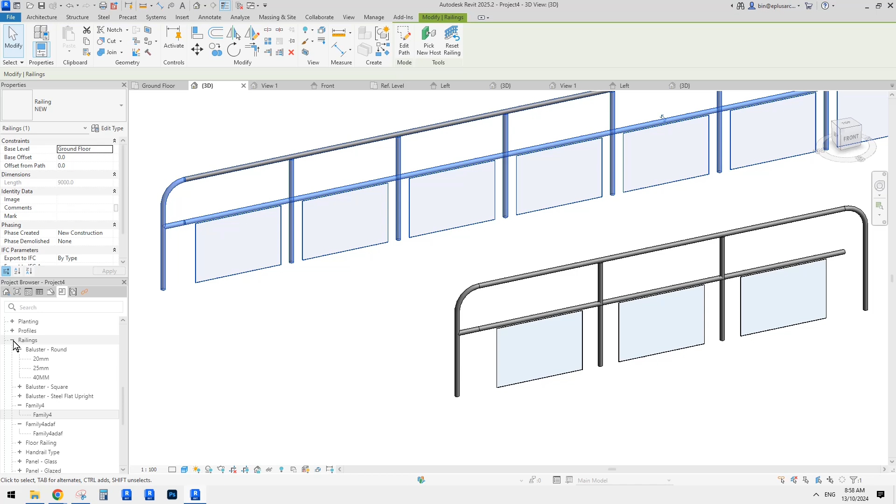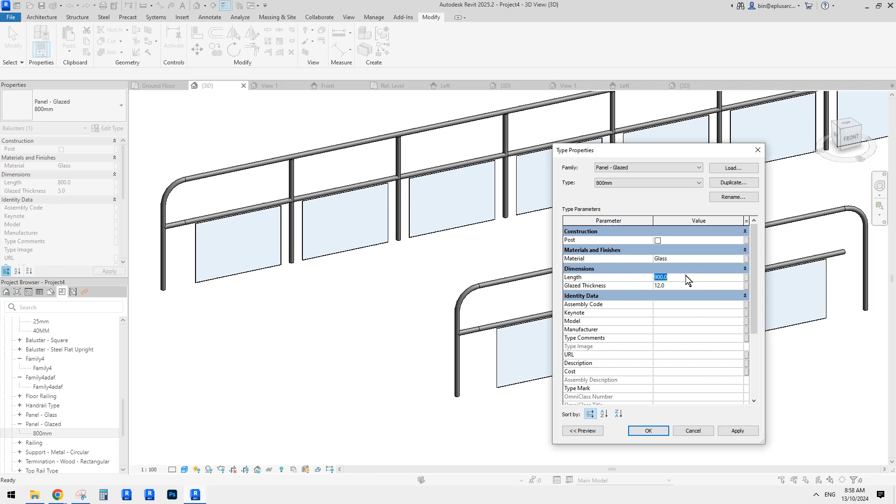So then you go to family, project browser, on the railing I think. So panel glazed, right, this is the one, 800. So here you can adjust the size because there's a parameter associated to that width, right? So if I change to 900, for example, change the thickness to 12 mil, and then change the material to something else like a solid thing, I'll just create a new material. Okay, and then it will become a panel instead of glass.

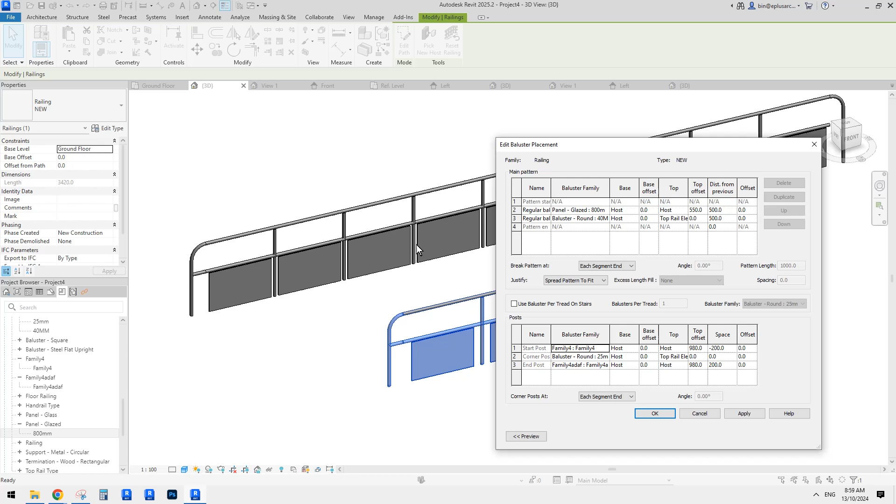And also you will see because the spacing we currently have is the spread pattern to fit, depending on the length of your railing, the space will also be different. So if you use center, for example, you will always keep the same spacing, but at the end you will have this different gap, right? So I think this is it.